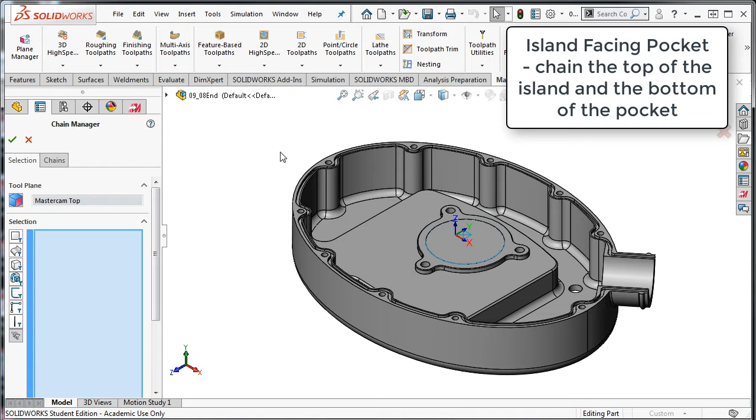I'll select the pocket toolpath from the 2D toolpaths. When chaining for an island facing pocket toolpath, it's critical that the top of the islands and the bottom of the pocket be chained. This is how Mastercam will know the Z level for the top of the islands and the final Z depth of the pocket.

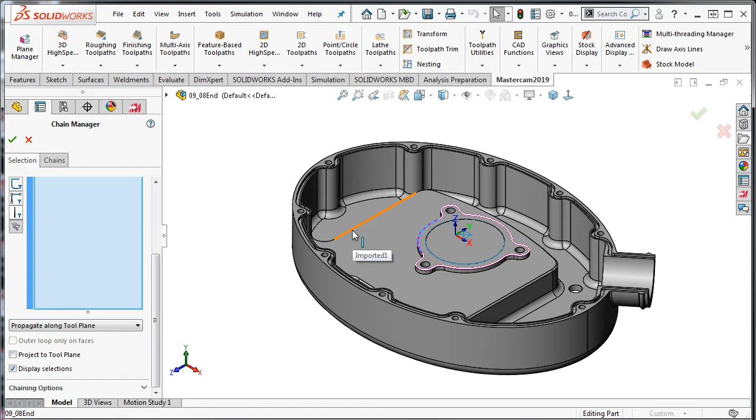I'll chain the top of this island, scroll down, and select propagate along tool plane, and the top of this island, and the bottom of this pocket. I'll accept these 3 chains to end the chaining.

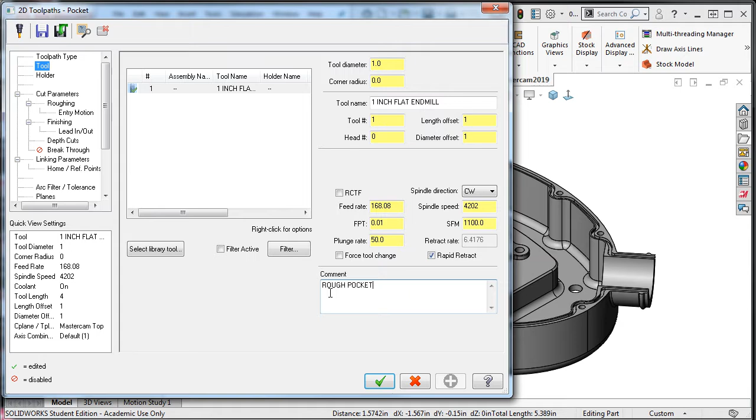I'll select the Tool tab, and I'll reuse the 1-inch flat end mill, adding the comment to rough the pocket. I'll select the cut parameters and choose island facing as the pocket type.

The default settings from the last toolpath should be fine, but I'll add 0.05 material to leave on the walls and floors, as well as 0.05 to leave as stock above the islands. This should ensure the chamfers around the islands are not machined.

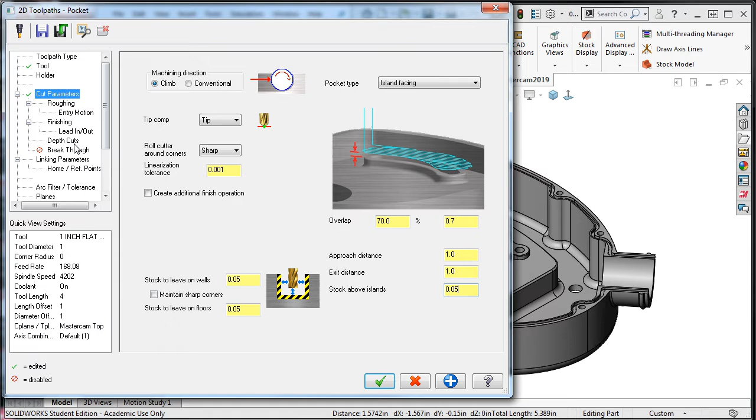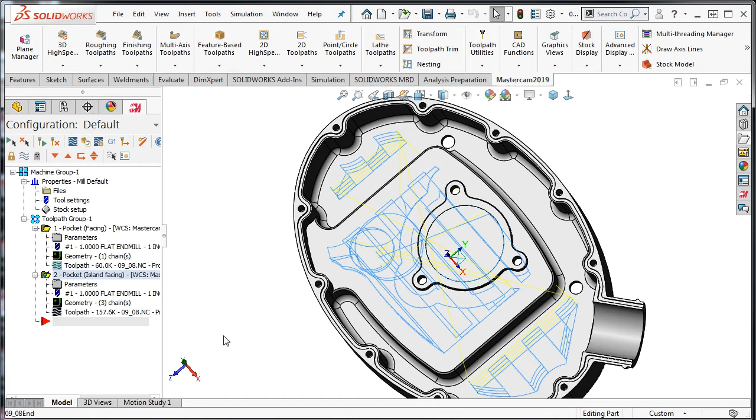I'll select the depth cuts and set the maximum rough step to 0.5. I'll leave the rest of the values at their default settings and accept these selections. The cut lines show how the pocket will be roughed, and you can see that there are several places the 1-inch end mill can't enter. I'll try to fix this by selecting a new cutting tool.

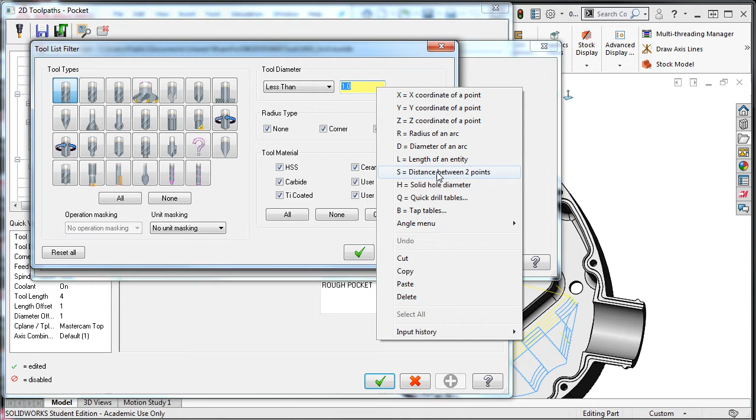I'll select the parameters for this operation, then the Tool tab, select Library Tool, Filter, and for the tool diameter, I'll select less than. I'll right click in the tool size field and select S equals the distance between 2 points.

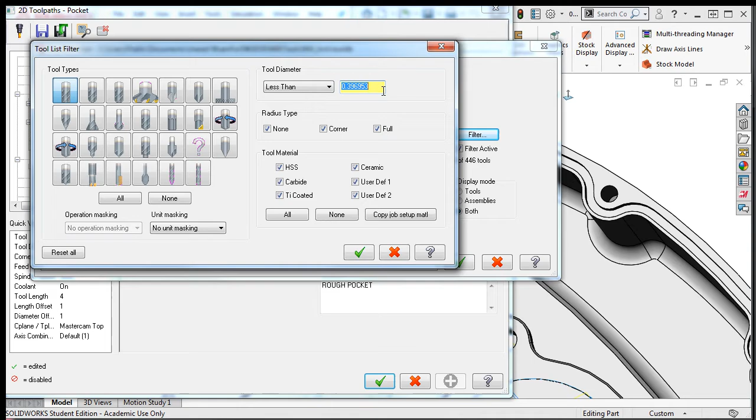I'll zoom in here and enable the option to use cursor position only. I'll select these 2 points, and I'll repeat this analyzing process between 2 points for several locations so I can decide what size cutter to use.

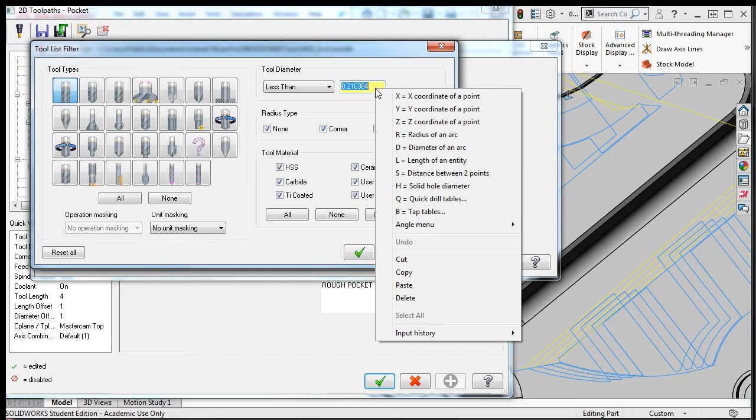Now that I know the smallest distance is just under 1/4 inch, I can calculate the tool size that should fit this geometry. Next, I'll analyze the depth of the pocket so I know how long the tool's flute length should be. I'll right click in this field again, and this time I'll select L equals the length of an entity. And select this line. This length is just over 1.5 inches.

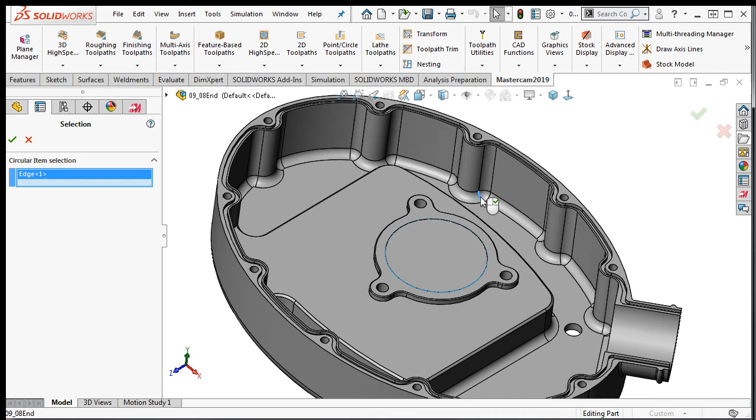I'll right click again, and I'll select R equals the radius of an arc. Select this arc, right click to accept this. Since this radius is 3/16, I can add it to the 1.5 inch length and see that the tool will need at least 1 11/16 of an inch of flute length, or extend beyond the face of the tool holder by more than 1.6875. I'll search for a tool with at least 1 3/4 inches of flute length.

I also need to consider that I have left 0.05 on the wall, so the tool diameter should be less than 0.26 minus 2 times the 0.05. Because this value is so small, I know I'll not find a tool small enough to clean up the pocket all at once. I'll exit these windows and leave the 1-inch end mill as the cutter.

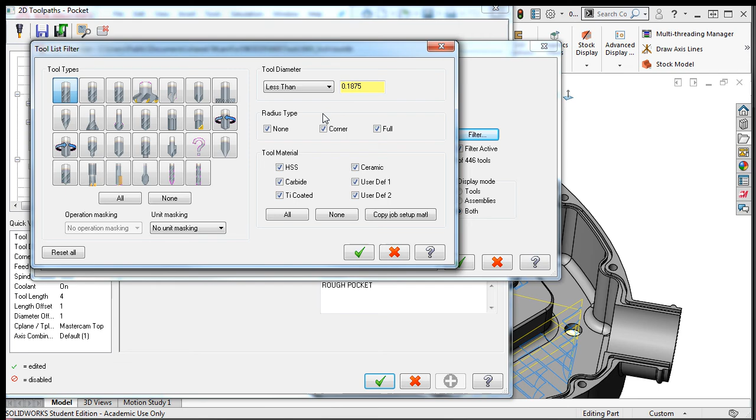Later, I'll use the remachining toolpath to clean up the areas where this tool could not go. In the next lesson, I'll simulate this toolpath and look